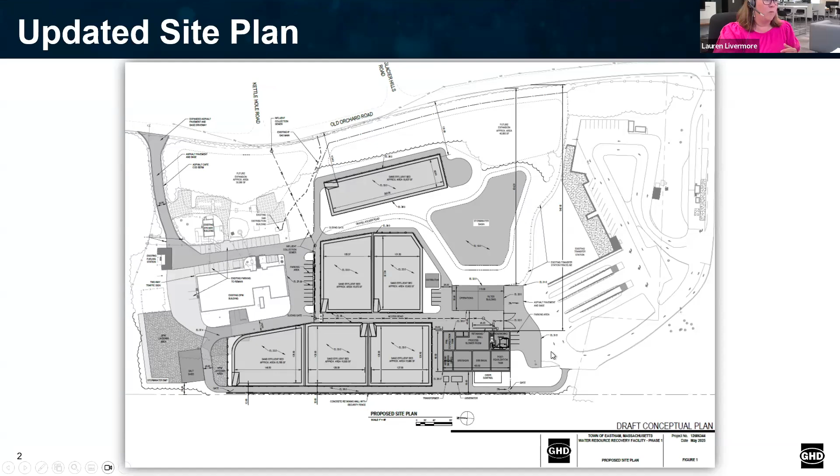So this is the site plan that we've come up with, and I'll go to this one, which is a little more zoomed in and has some of the colors with it. And at the end I do have our old one if someone wants to reference it.

But what we've changed here is essentially moving the administration and operations building and the SBR building, or the treatment building as we're calling it, from these general areas down to basically the southwestern portion of the site. In doing this, we liked having the building over here because the elevations were able to be taken advantage of with this pit. If everyone remembers the DPW site, it's kind of depressed in this area.

In this area towards the southwestern portion of the site, the elevations were somewhat similar, so we were able to maintain a lot of the work we had already done relative to hydraulics and pumping schemes. We just had to change things around slightly.

We were also able to maintain a lot of the recharge beds in their originally placed areas, so the perc tests and other tests already done could still be utilized. We'll have the Mass DEP representative come back to witness two more perc tests, but we've already done perc tests in these areas, so we're confident about the recharge rates we'll be receiving.

Did you add another recharge bed? No, it's the same square footage of recharge area, just arranged differently. If you don't mind, I'll skip to the end quickly. So these are just bigger, right? Yeah, we ended up having 6 here with 1 smaller, and these 5 essentially bigger. This was where originally everything was - the admin building, SBR building, and those 6.

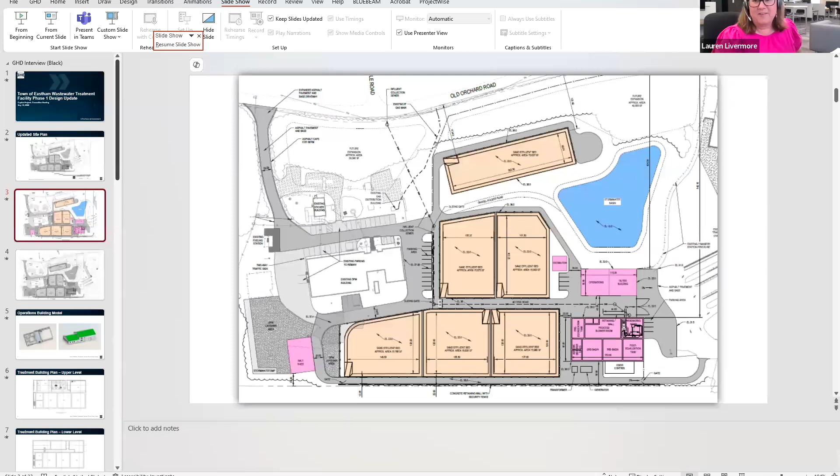So we still have 6. Let me see if I can get back to this more quickly. Go through all these... okay, there we go. No, sorry guys, just trying to be fancy here. So yeah, still 6: 1, 2, 3, 4, 5, 6.

They actually, for the most part, still maintain the same amount of area necessary for phase 1 and the potential phase 2, just slightly different shapes. I joked at our meeting that I'm very much a symmetrical person, so I'd love for them to all be the same size, but it's very common for these recharge beds to be different sizes to meet the needs of the site. This is fairly typical.

Also, in case you're looking at the site plan, we did allow for some future expansion areas in parts of the site. These are the forested areas we really wanted to try to maintain as much of that tree buffer as possible. We don't have our landscape architect on this yet, but we're planning on adding additional fencing and evergreen trees to potentially block the view even more than these trees already do.

So yeah, still 6. Any other questions for this? And you can always come back to it. Okay.

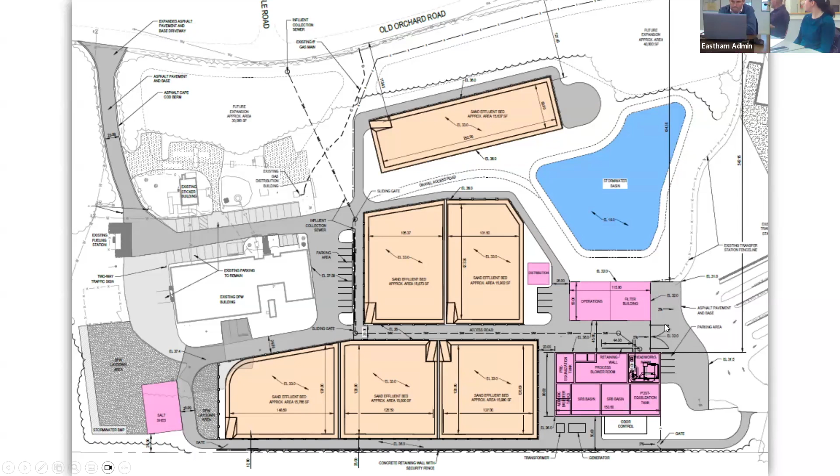So this is just to illustrate what the topography is in the area. Again, we're trying to make use of some of the existing elevations so we have a little bit less cut and fill to do, taking advantage of this existing pit for our stormwater basin.

One question that came up was that we had originally done all the calculations for the stormwater model and sized the basin for the previous site plan. Now that this is pretty much set, we'll be redoing those calculations to confirm the size of this basin. It takes on not only impervious area from the DPW and future wastewater treatment plant site, but also stormwater from the transfer station site, so it ends up being a sizable basin to accommodate all that.

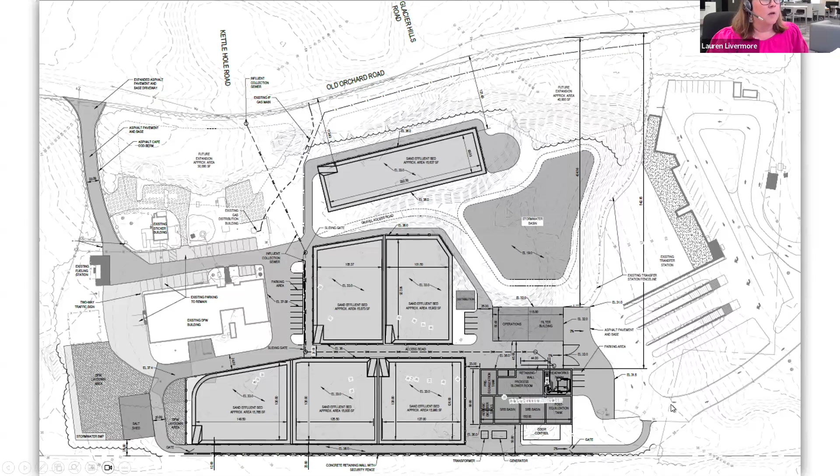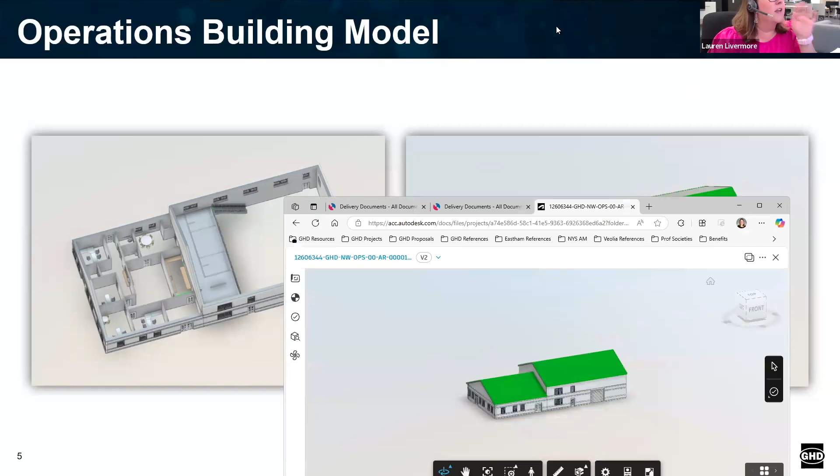So next I wanted to show a little bit more. I was able to show some of the drawings, so bear with me because I do want to show - can everyone still see my screen with the change? Yes, okay perfect. So we'll have all of the buildings in the Revit model, but right now what's finished enough to show is still the admin building.

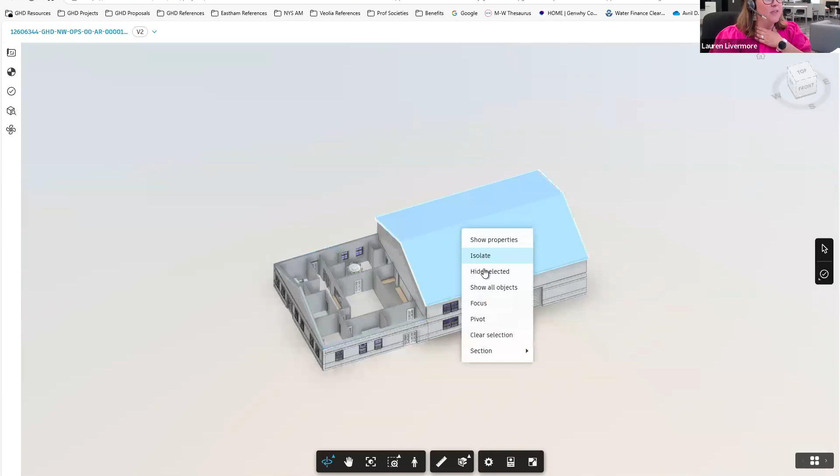I did want to show that we can actually go in, and I think we can even have external users be able to view the site that we have. This isn't the current version of the admin building, but this is what it was before we had a few additional comments with some of the offices and the break room, and this is our lab area.

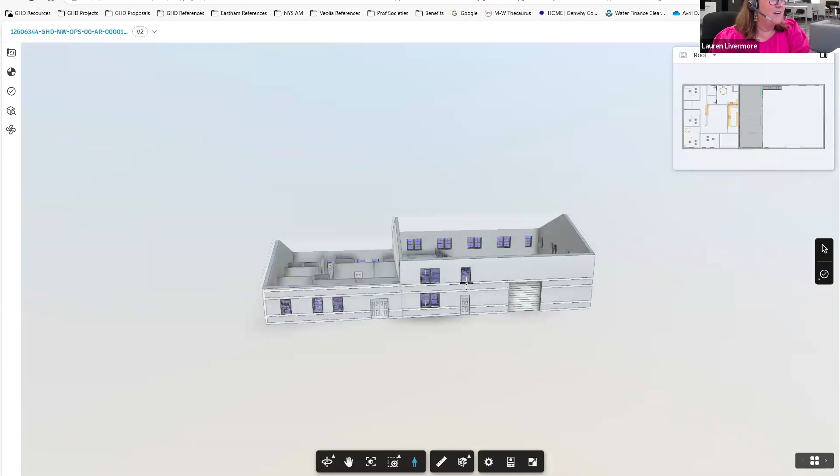In these models, and I'm not really perfect at this yet, you can actually bring your person into here. Of course it's not going to do what I want it to... you can actually walk it. Oh yeah, there we go - you can go through the door. Oh, it let me do it before.

Okay, I might not show that. Bear with me one second.

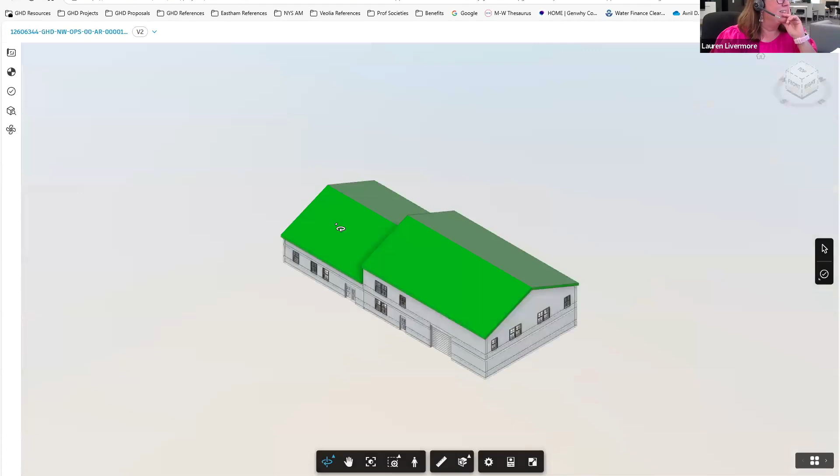But it is really cool. Once I get a little more mastery in this, we'll be able to walk you through the site and the different buildings, so you can get a firsthand view of what it really looks like. This is something we'll have for the other buildings as well, and it's just a nice tool to be able to show. Any questions with that? Sorry, I wasn't really good at getting inside the building.

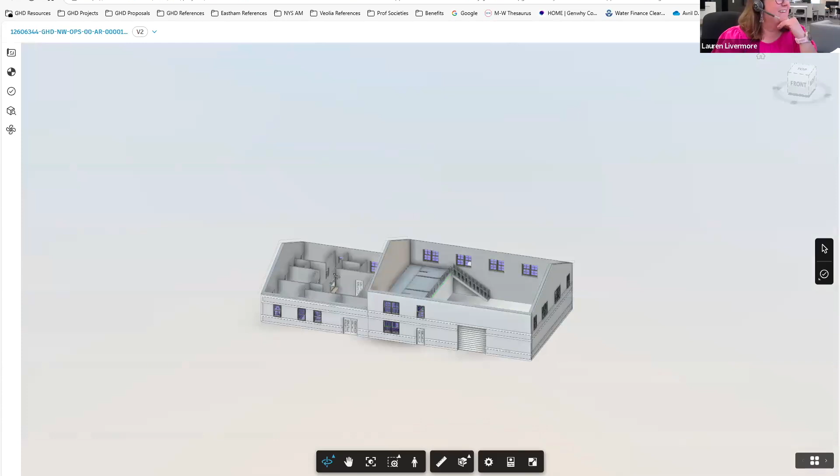Lauren, I just want to explain to the committee, because I think this is a change since last time we talked as a group. We initially had additional administrative office space, the idea that maybe DPW admin staff would relocate to that building for a future DPW renovation, which might minimize what had to be built, perhaps getting away with just the garage and some open staff space. But with the reconfiguration, the admin building now is not going to be in a public area, so we scaled back the admin building piece of the wastewater building. We'll just continue to operate the way we do now at the DPW.

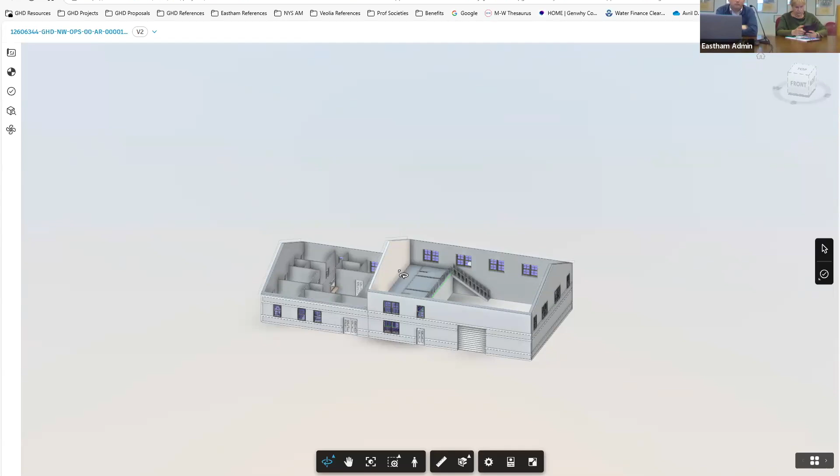Yeah, that's a good point, thanks for bringing that up. So we are looking at making some efficiencies right now, so it won't have the public-facing area to pay bills or anything of that nature. We're looking at a couple options of how to accommodate some common space and maybe make the break room a little smaller. So more to come in our next iteration.

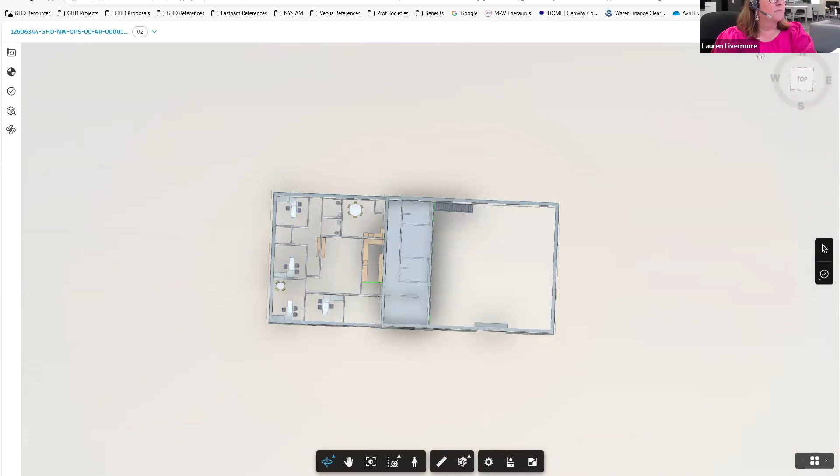Okay, so that's that. Again, I didn't have the model—it's still a little too rough right now to show—but I did want to show a bit more of the treatment building. This one is in the far southwest corner of the site.

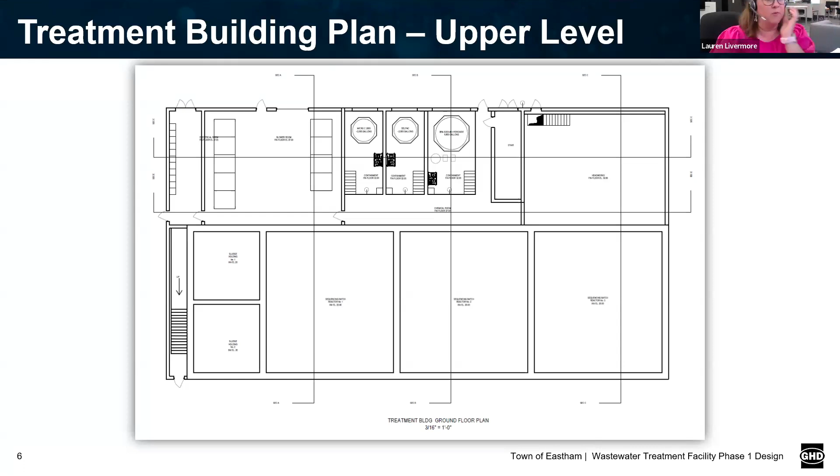Have you seen the transfer station up where we dump our trash? You'll see the building - I'd have to check the elevations, but I think that's a little bit higher, or maybe similar.

I think it's 13 feet above grade from that angle. You'll be able to see part of the building, and the tanks will be behind it, so you might see a little bit of the southern tank. But if you're down at the lower level of the transfer station where you drop off metal, you'll be looking right at it.

As you go down that hill toward the transfer station, it's lower, then it goes back up. So you won't be looking into the tank from that metal area, but you'll be looking at the side of the tank and the side of the building - basically the same elevation.

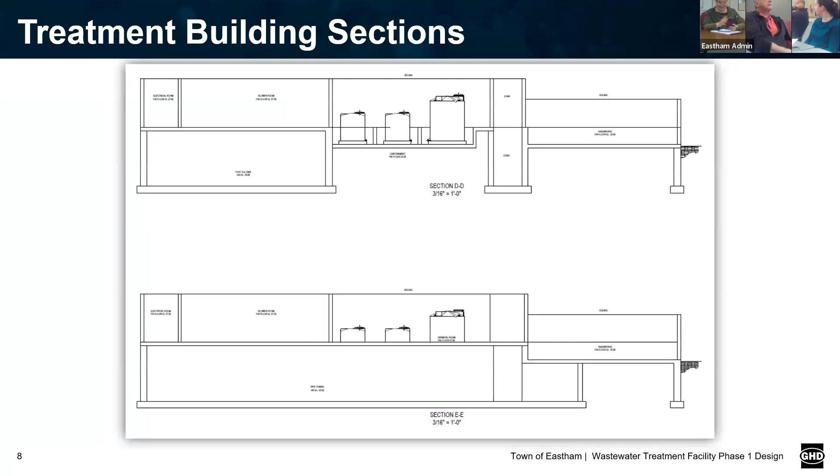Once we get the model, we can show how it would look on the grade, which I think will be helpful for people to get a good sense of it. You could show a cross section there, through the tank and the building - oh, there it is.

Let me get my bearings straight - this view is looking at it from the east, so you're kind of looking into the building. We've made some updates so things are shifting around, but this is a cut in the middle - you can see these are our chemical tanks that are set down into the structure to act as secondary containment.

This post-EQ tank, which you see on the plan, is actually underneath the blower room and will have an access hatch, so that's not open to atmosphere - you won't be able to see that.

If you look at the second plan, we have a pipe gallery. There's a couple of entrances into this pipe gallery, updated since, where there'll be pumps to pump throughout the treatment plant. You can see this is the stairwell leading into it, and then the headworks facility is up here.

You'll be able to enter that just about at grade. On the east side is where you'll have a roll-up door to remove any screenings and grit, and these are our SBR tanks on this side. Looking in from the west, the chemical tanks will just be slightly above, in the building or room where you can see them.

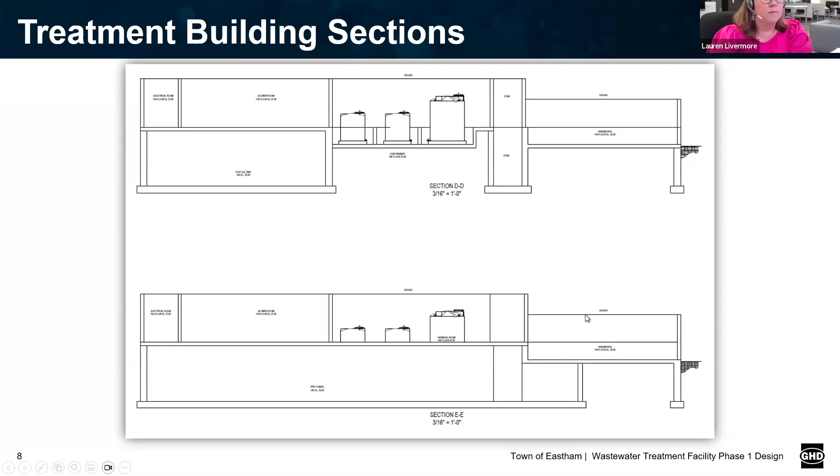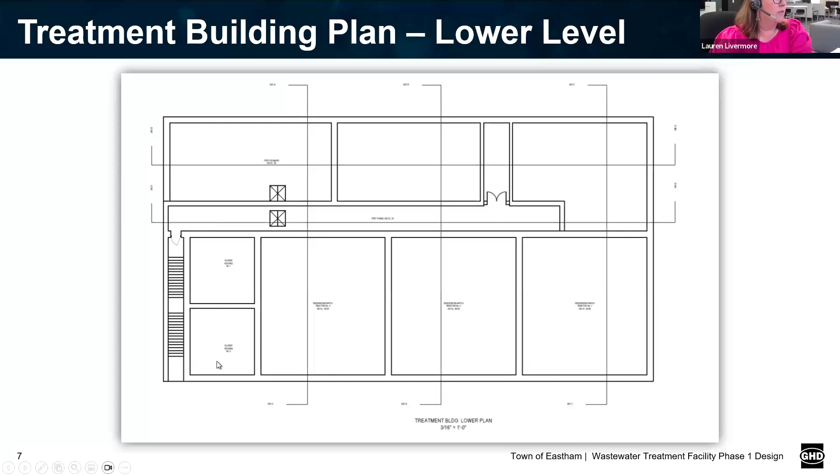Does the building have a roof? Yes, one side of the building has a full roof with a ridge line running north-south. This other part is essentially tanks that would be, in theory, open or covered, at approximately 8 feet above grade, and similar - these will be covered. So it's this portion that will have a roof, and these tanks are pretty set into the ground.

Is this where you were thinking about putting a roof to accommodate people concerned about sight or smell? Yeah, a partial roof. When we were looking at the design before, we had these tanks facing Old Orchard Road, so we were looking at ways to cover them, or cover them with a structure or a fence, since there's a lot more people and activity over there.

But now they're towards the southwestern area. You might have some traffic on the trail, but we'll again have some coverage there.

Did you ask a question? What's the right of way off the bike path? I don't know - that's DCR. We're not going up against it, this isn't that close to the bike path, it's definitely on our property.

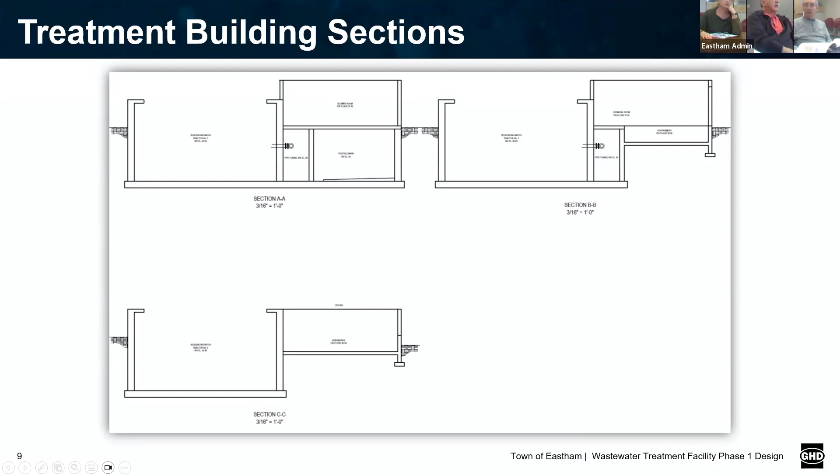Yeah, we did have a drawing, I don't remember exactly - I'd have to check back, but we did have a drawing that showed a distance from the bike path, or maybe the bike path property at one point. I have to double check.

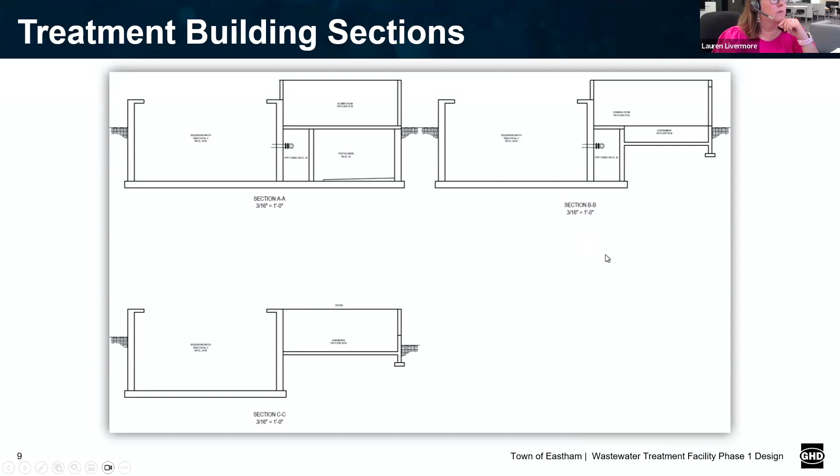So I guess a couple things, and I don't want to steal any thunder, but some things that were being brought up relative to public outreach. These are a few slides I had sent to Hillary, and I think you incorporated them. But just so everyone on CPC is aware, we did try to look at some of the things the community would be most concerned with, and we picked out essentially noise, traffic, and odors.

So we were looking at noise and tried to find the most prevalent sources. Honestly, for noise, I was not too worried about it. We have process blowers, which can be very noisy, especially some of the older ones from years ago. But these, and this is just an example from Mashpee, are Aerzen blowers, which are turbo blowers, and they're not only in the building, but will be in a noise attenuating enclosure. I mentioned at the last meeting that there's a specification keeping the decibel level at a certain amount one meter away, about like the decibel level of a loud restaurant. So just wanted to talk about how we're mitigating certain things to help with community outreach.

Truck traffic, similar thing, I think we've gone over this. There'll be sludge haulers coming a couple days a week in the beginning, and then maybe once a day by the time the collection system is fully built out. But really it'll be far less, and I'm probably jumping the gun on some of my truck traffic stuff, but it'll be far less than what you see at the transfer station right now.

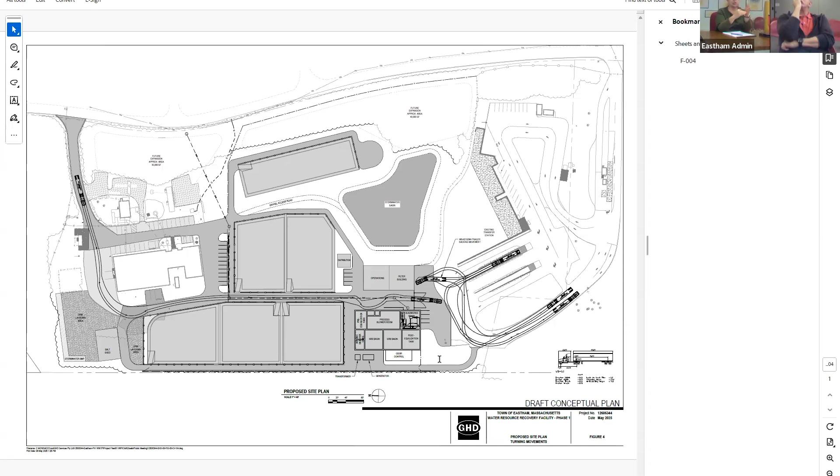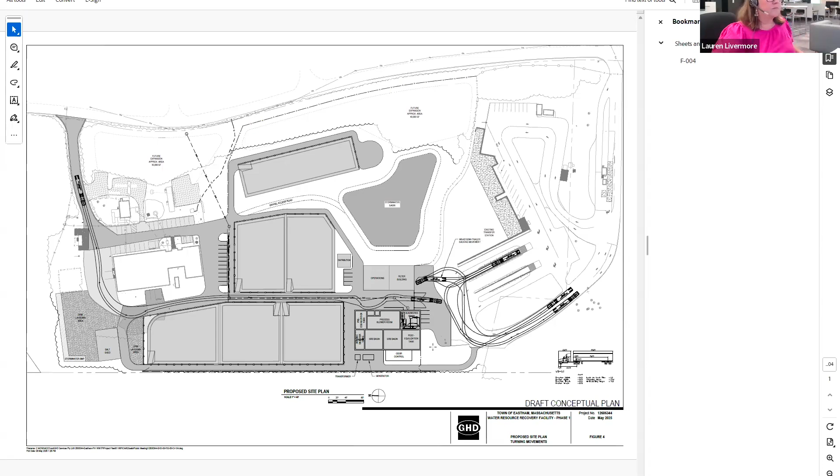When it's sucked out of the treatment tank, the sludge goes first into a holding tank, not directly into a tanker truck. So in this SBR basin, the sludge collects at the bottom and gets pumped over to these aerobic digester tanks.

These digester tanks are covered, and there will be some type of coupling valve, probably right about here, that allows the hauler to hook up their truck and pump out. Similar to the SBR basins, they'll pump out of one tank one day, then come back three days later and pump out of the other one, and vice versa.

So that's an intermediate step - the sludge flows into the digester through pipes, not by truck. The truck is just one tiny piece; it isn't part of the treatment itself. That's enclosed, and then the truck comes to vacuum it out of the digester tank.

So the aerobic digester actually has a function of removing - or how do I say it - making the sludge more stabilized, removing volatile solids. Trying to figure out a good way to explain it, but yeah, basically it's part of the treatment process.

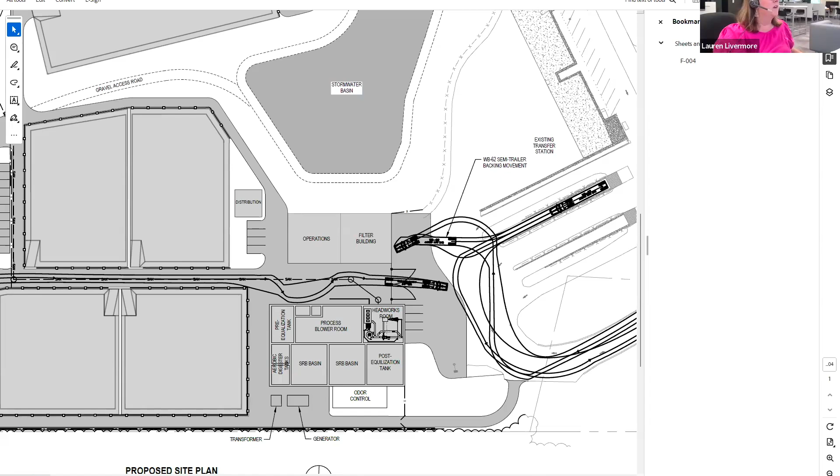A couple questions - if I'm riding my bike on the bike path, am I gonna see the tanks? Let me check. They're 6 feet above grade. So higher up - that will work, so you might be looking down.

And that's something too we can check, because originally I know we had done some of the elevations through Oak Orchard. Oh my gosh, there's an Oak Orchard in my area. So we didn't really look at it from the bike path, but I think you're just gonna see the side of the tank. The elevation of the bike path is around 42, and the tank around 38, so it's pretty close.

I think you'll probably just see the side of the tank for the most part, but that's something as we get this - people are gonna ask. I think it will be good to have because you're right, people are gonna ask. Over here, we're planning on putting some type of buffer landscaping and fencing so they won't see the odor control unit or the generator so much.

There's some pretty dense vegetation there at the moment, in between, and quite frankly it's not really an attractive site. So after a site visit this past week to the transfer station site, having a deep look around in a way I haven't yet, I recognize that what we're building is actually going to appear nicer and fancier than what's there, with vegetation and screening buffers.

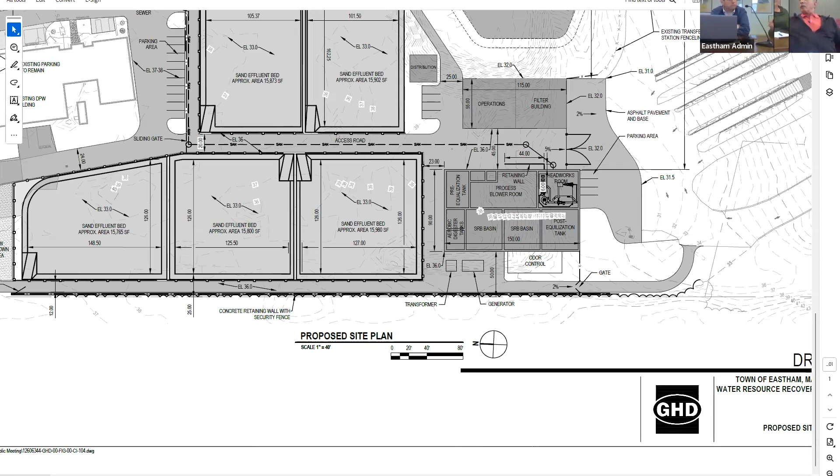I'll say I am very biased, obviously, but there is a plant in my area next to a trail that leads around the local lake, and they are planning on putting up public education signage to teach the public about what is behind this fence. So in the future, depending on how much you want to do with public outreach, you might be able to do something like that.

And what goes on in the odor control building? So the odor control unit essentially takes the vacuum, pulls a vacuum on this headworks room and these digester tanks, and treats the air - I think we're looking at it might be a biofilter, or I can't remember the other model we're considering, but essentially it's not a scrubber, it cleans the air before releasing it into the atmosphere. So that's where all that magic will happen to take away odors from the aerobic digester tanks in the Headworks facility.

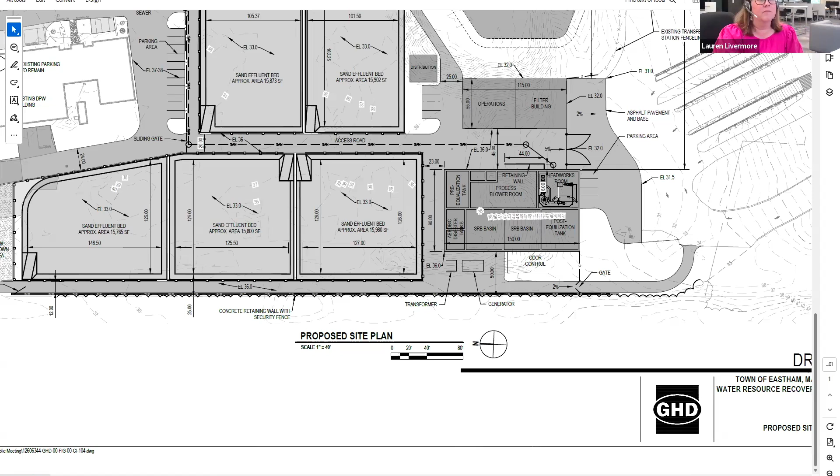I guess any questions? Oh, we didn't cover that yet. I didn't really get that far, but we were just talking about odors. I think we actually covered all this.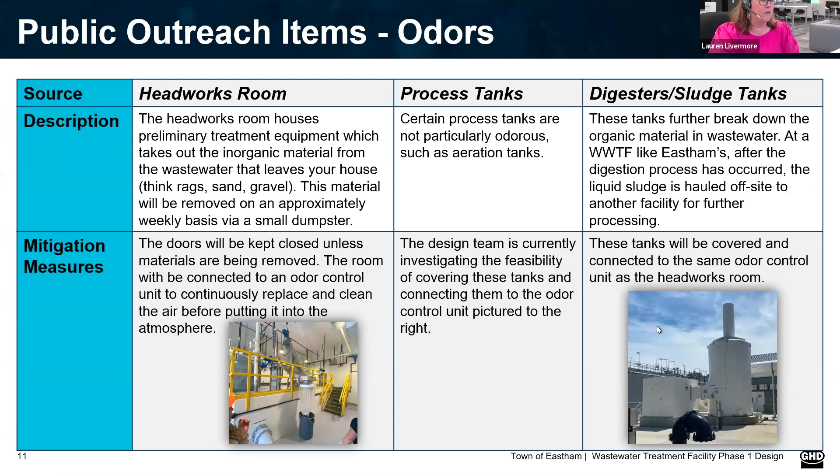So this was the one at Orleans. Just an odor control unit that exhausts the air once it's cleaned.

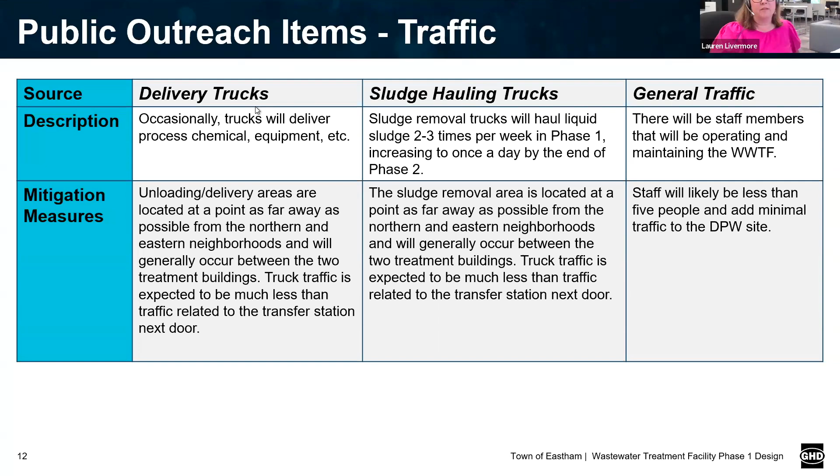And then I think we just talked a little bit about traffic. Same thing, there'll be a little general traffic, a few more workers, sludge hauling trucks, and occasional delivery trucks for chemicals. If you get a new pump or something, they'll usually come on some type of freight truck.

I don't know if you guys have these in front of you, but these were some of the pictures I think Hillary might have included in the public outreach. This was Mashpee. These are very similar to the style of recharge beds we will have at Eastham.

Essentially you can kind of see from the drawing, these are the pathways down for the tractor to be able to grade things out and make sure there's no plants growing in it. So this will look very similar.

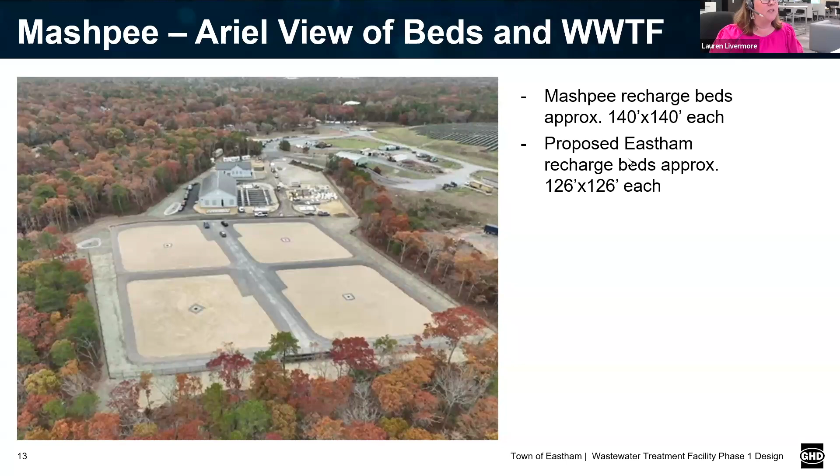And I put some numbers on the size of the recharge beds versus ours. I do apologize, this is pre-update, so this was the size of our original ones.

There was a question before - sorry, I think of recharge beds like the ones out in Nantucket. Do we ever change the soil and the sand that's in there, or is it just left as is?

I think every so often you've got to go in there and scrape the top because of the buildup - just a sacrificial layer of sand, about an inch or so, every so often. You may not need it here at the beginning, but then they scrape it with a machine, just barely scratch the surface. Sometimes you don't get that buildup. And what they scrape off, that has to get taken away too, and then replenished - they add whatever's needed to make up the difference.

And this is not special sand, this is just what we got around. I mean, it's not special in that it's unavailable, but you do have to make sure that it's clean sand, washed, and of a certain gradation. So it doesn't have to be a specific sand, but it is available - somewhere between our sand and playground sand.

All right, but we're not going to... No. Nice of you. Yeah, so that's the kind of unfortunate thing - even though your site is covered in sand, you can't necessarily just take something from the pit and put it into the recharge beds. Unfortunately, that would have been handy.

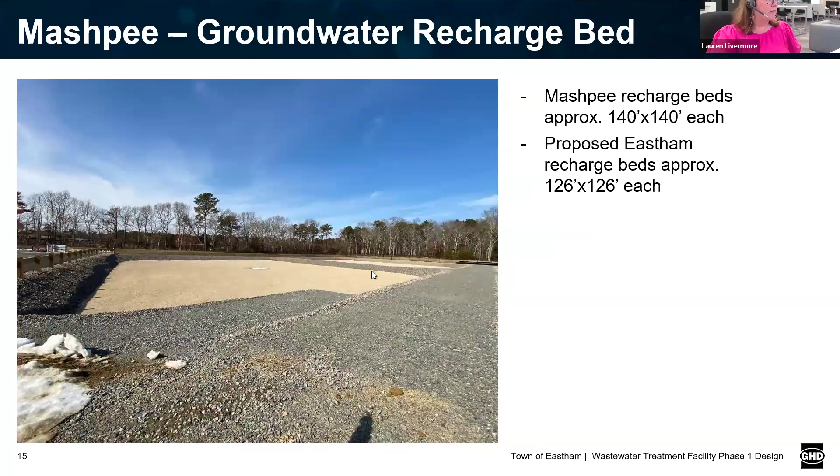Let me see if I got this right—yeah, that's just a close-up picture. You can kind of see the pathway down for maintenance. The building setup is a little different at Mashpee, so this only includes the headworks facility, but this was just a picture showing the standing seam roof and what the building could look like.

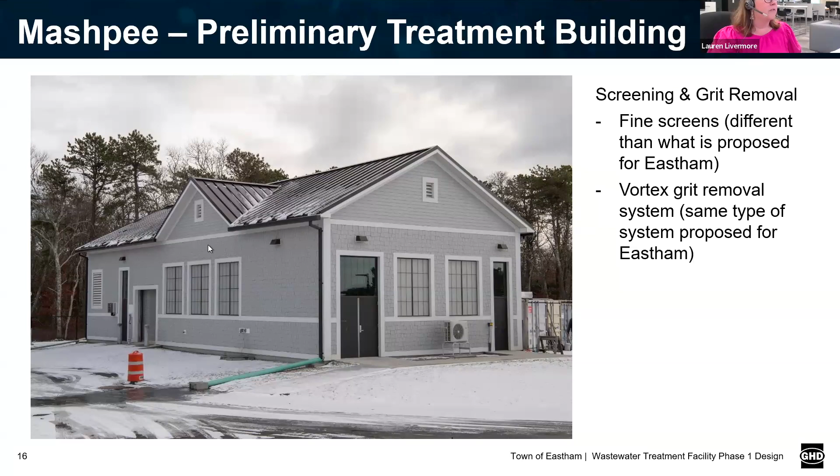These are like translucent panels, so they bring some light into the building. The screens are a little different at Mashpee because they've got a different treatment process, but the vortex grit separator is similar. This will be a similar unit that you'll have.

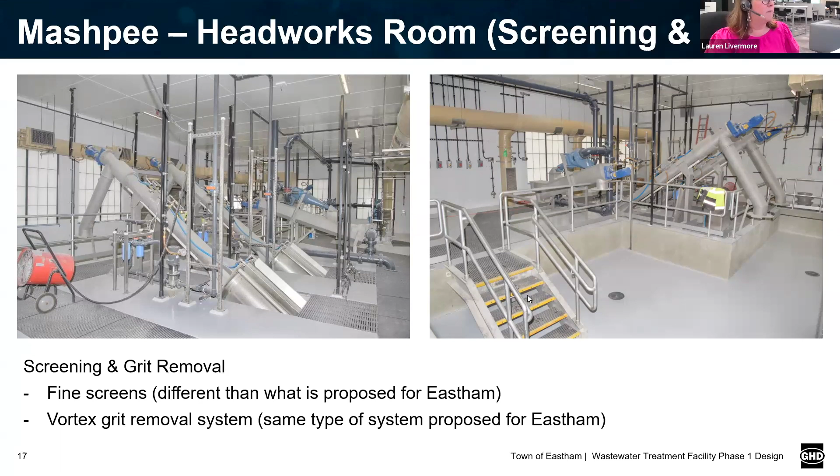And again, this is their larger—oh, somebody had a question? When you said they have a different process, is that because technology has improved, or is it just different because we thought we wanted to make it different?

I don't have the history behind Mashpee, but they have a membrane bioreactor, an MBR. In a previous project before I got involved, we looked at an MBR versus an SBR, a sequencing batch reactor. The sequencing batch reactor met all of the expected permit limits and was cheaper from a capital cost and operations cost standpoint, so that's why that went. I don't know the history behind Mashpee, but I could find that out.

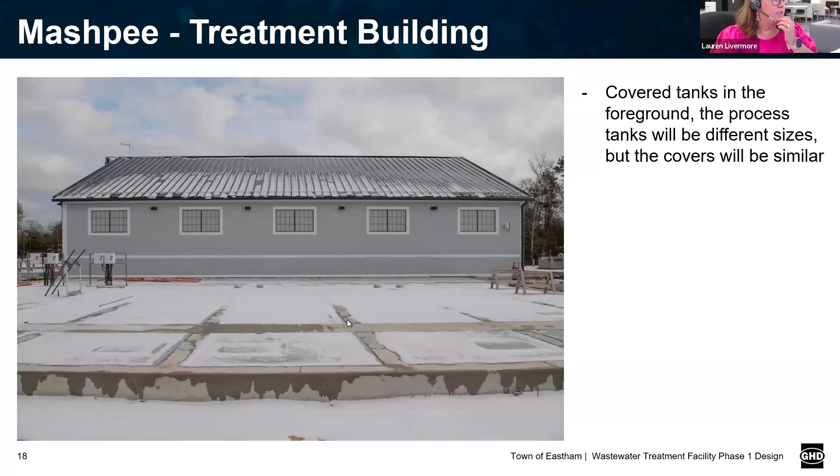So their tanks are actually—their MBRs are actually in these tanks right here. Generator, I already saw that. Oh, these are those blowers.

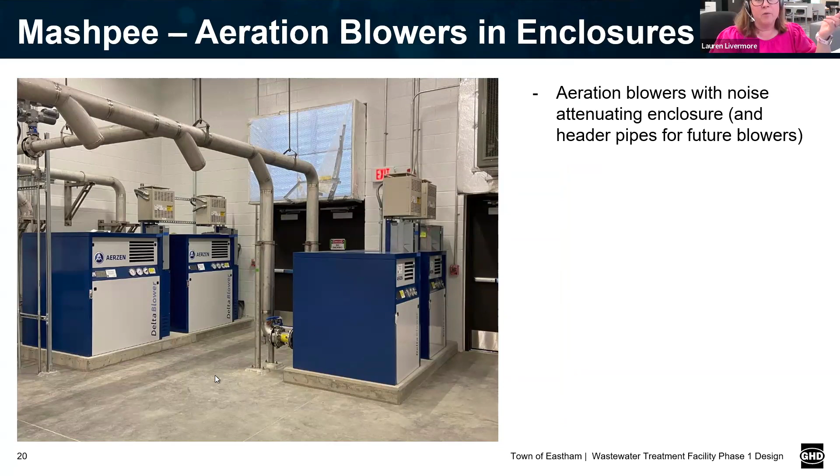I think you probably saw a picture. Similar to what we will have, they've got the header with a few, I guess I'll say, drop legs to hook up future blowers as they expand. So you'll have something similar to that.

And this is the picture—this is Orleans, and I think this is the one that Jackie Beebe and others went to. This actually is about, I'd say, 20 to 30 feet tall. Oh, there's a big stair.

By OSHA you have to have rest platforms every 20 or 25 feet, so this is definitely a lot taller—there's an intermediate rest platform right here. If you think this is like a 6-foot-tall person, maybe where the form ended right about here, that's probably about the height the tanks would be at Eastham. So I did want to show that.

And these were just some of the previous layouts I brought up just in case. So I guess that's what I had. Any other questions? Why is Orleans so tall?

That's a good question. I don't know if it was related to the soils in the area or the hydraulics. Originally, when we were looking at having the treatment building on the north part of the DPW site, we were planning on having tall tanks so we wouldn't have to dig into the ground and excavate, or put in sheet piling to keep the sand out of the excavation. That's why we really liked putting it either in the pit area or in this lower area, because we can take advantage of some of the lower elevations.

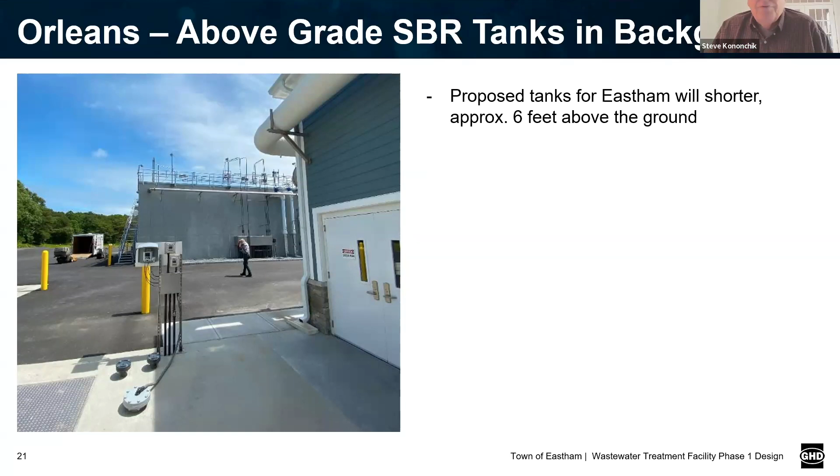That is a great question. Honestly, it should be very minimal. I don't necessarily have a decibel count that I could share right this second. Maybe decibels isn't transferable to the public - maybe it's more like you'll hear nothing, or you're gonna hear occasionally. There's got to be some sort of description, I would think.

I think what I tried to put in here, maybe I can make it a little more visual. For our specification, the decibel level needs to meet 77 decibels, 3 feet away from the equipment. So that's in the building itself. For comparison, a normal conversation like we're having right now is 60 to 70 decibels, and a telephone dial tone is 80. So maybe we could use something like that to explain it.

Outside the building, which is where the public hearing is, you shouldn't be hearing anything. But we could look at how it would sound at the trail, because that would probably be the loudest area. I think it'd be more interesting. I can look at how you can degrade the sound as it goes a few feet farther.

Watch out, that pump must make quite a bit of noise on the truck, or that pump - take like the honey wagon, but they pump it up. But isn't that the same as you have in your backyard that's pumping? It's like pulling up to the septic tank. Yeah, it's just more open - the septic tank is more open, right? This is a closed connection.

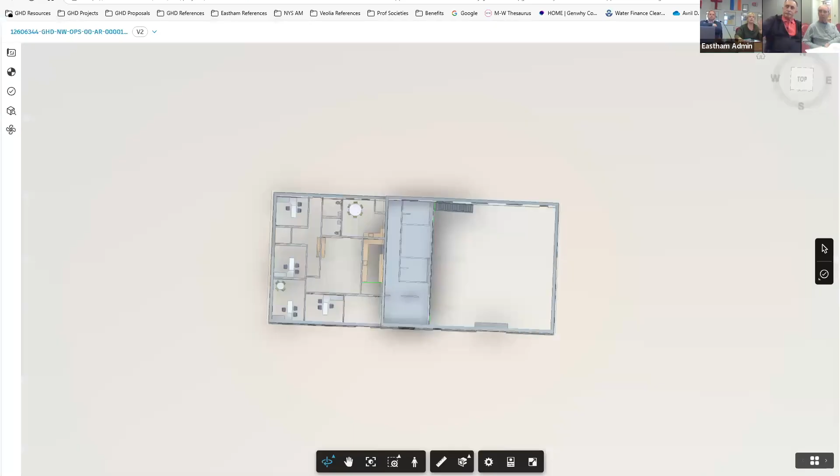Lauren did have a diagram of the main tank that's processing and how it segments out. I looked for it, but don't worry about it today.

There's a lot of good educational materials on YouTube, some good examples. If someone was interested we could send them a link or have a QR code they can scan. Yeah, that was a pretty good one, I thought.

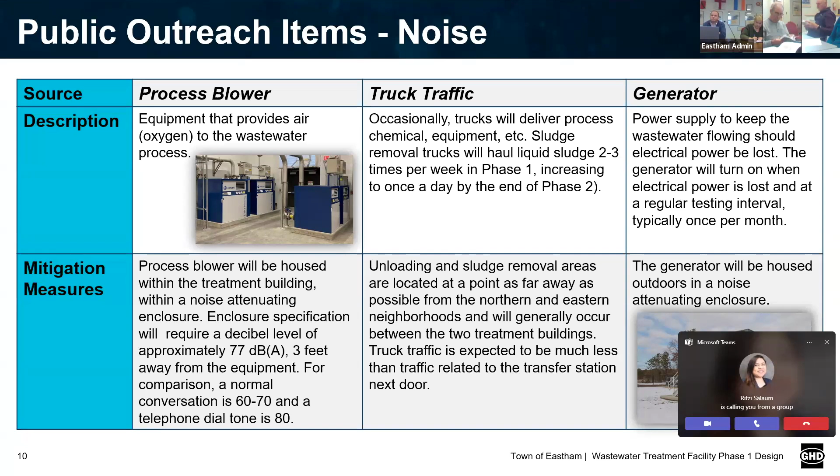This is from the April 8th committee meeting, where you had this long explanation of the SBR and the cycle time on each phase. That's pretty, but it is confusing when you verbally explain it.

Like what tanks are covered, what tanks are open, what's going in from underground versus above ground. People are nervous about anything that's open to the above air. But the only thing that's open, I understand, is the SPS.

Correct. What's the noise level of a pumping station? Is there a noise level? Any of the pumping stations that you put in different parts of the collection system, does that make a noise as well?

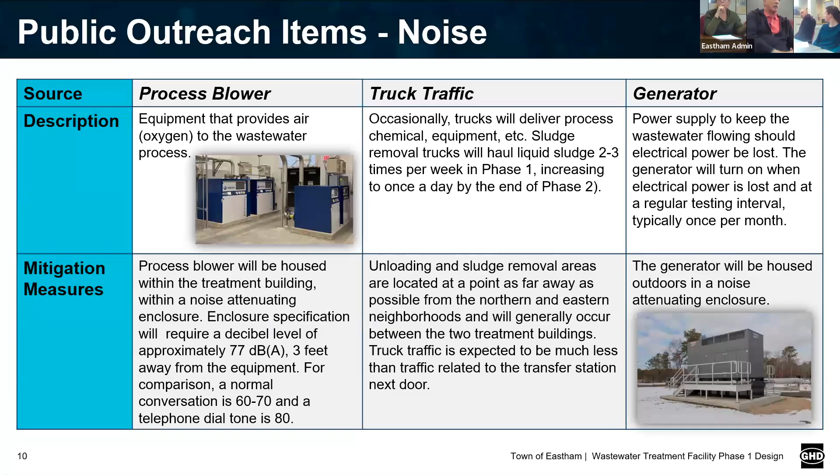No, those are below grade pumps, you usually don't really hear anything. The only thing you would hear is the generator when it comes on, if there's a loss of power or if there's an exercise test.

I'm just asking if you're putting them in a place like Cape Cod Children's Place, or a duplex, and you're driving by, would you hear anything? You would not hear it. I'm just curious. And the generator might be mentioned too — it's indoors, so that helps.

Is that a pumping station in the Stop and Shop parking lot? I don't know about Stop and Shop, there's one on Old Colony Way. I saw that one. Probably it's above ground in the Stop and Shop parking lot, next to the pizza place where they've got it all dug up. No, this one's in the parking lot. There might be something else — a fact sheet for people about pumping stations.

They dug up the whole thing because that's a different geography. Are you talking about Orleans? I don't think I've seen that one — everything's underground, they just look like sheds. Oh, they put a pump station there for the Stop and Shop and the development behind it, I think that's what they did. I saw that at the New Year presentation. So it's its own pumping station for that whole development.

So next time you're in the Stop and Shop parking lot, out past the other drive that goes up by the bird store, you'll see a big vent pipe coming out of the ground, like a candy cane. I go there all the time, I noticed it but didn't realize what it was when they were building it. It's a vent for the wet well.

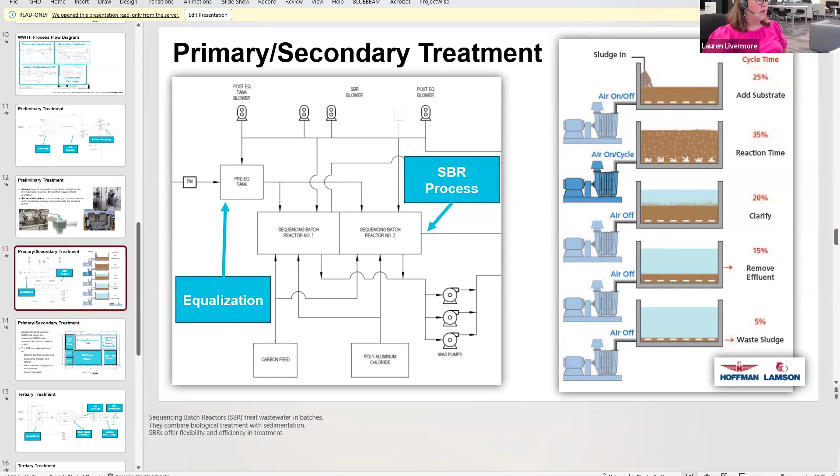And I think actually I had a picture. Oh, which one is it? Nope. Sorry, now I have so many PowerPoints, I don't remember.

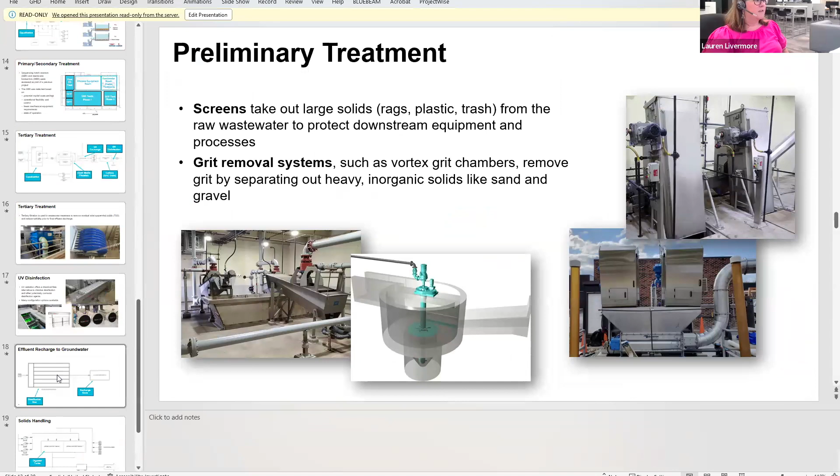So yeah, well, this is where it's coming out of. So it's actually coming out of here and going into a plastic sleeve. And I think I've got that.

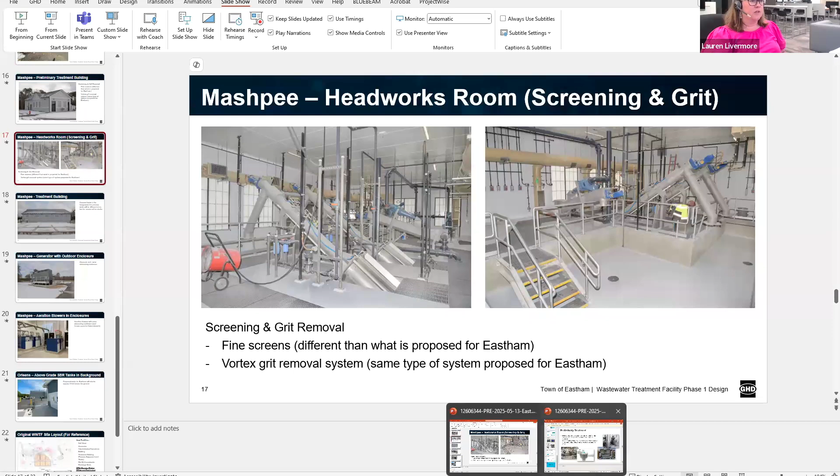If you have another question, I'll grab it while we're talking. But yeah, so you're making it even better because you're not just dumping it into a dumpster straight, you're actually washing it out essentially and taking the water out of it. And I think it's the details, like putting it into a plastic sleeve, into a plastic trash bag, rather than anything that would interact with the open air.

Right, that's a good point. So yeah, those are the things we need to know so that we can explain it to them. So I think it's this picture... nope.

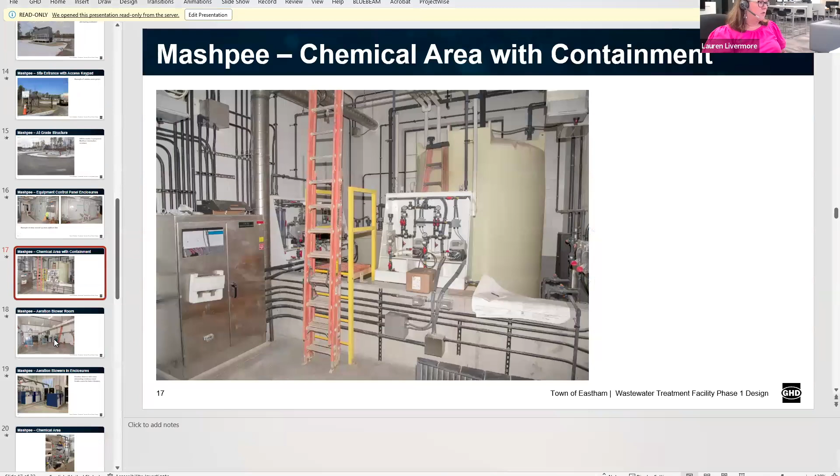I think we've got calculations on how much you would expect to see, but it's kind of hard to tell until things start coming down. But yeah, that's what you would see, and that helps mitigate the odors even more whenever the doors open. We can look at least for like a man door doing some type of airlock.

It'd be nice for people to see what the inside of this thing is like, how clean it is. I don't know if people understand that.

I'm just not sure, some of the pictures, I'm not sure that's a good one. I'm not sure what I'm looking at, so I don't want to show it to someone else unless I'm sure of what it is. I would just show it to them, to show how clean it is, not necessarily anything specific. That's why I like the visits, because they're exceptionally clean.

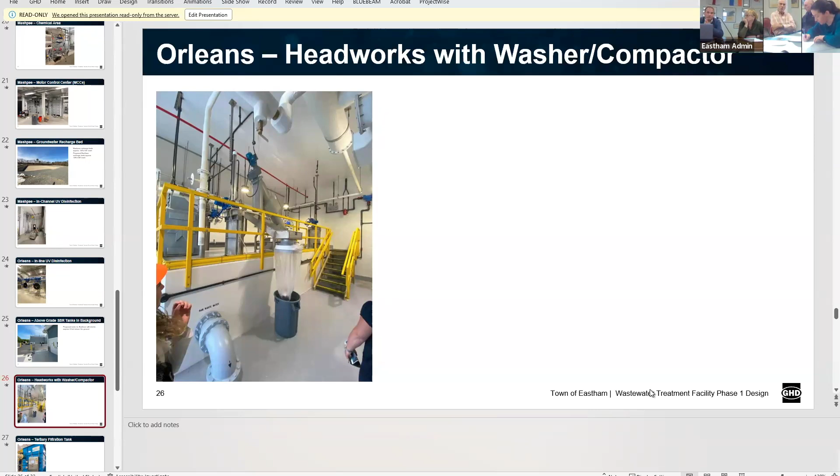The lawyers are still tweaking it, I sent it to bond counsel, so we could still get a recommendation based on the draft. Or maybe you feel you're not quite ready yet, and I was going to suggest perhaps you could defer it till town meeting floor. Oh, and when does it have to go to the printer? Tuesday, Tuesday.

It's coming Tuesday, yes, so Monday... Tuesday. There are lots of deadlines that have been kind of intense, to be honest. So we'll have to decide what we're doing on Thursday with the finance committee. So next Tuesday it goes to the printer.

A week from today, the select board will vote on the ballot questions, recommend the article or put it on the warrant, then recommend it, and then we go to the printers. That will be mailed out to everybody too. We're gonna do the same thing, just like a regular annual town meeting.

We may need a finance committee transfer.

Just one other piece on outreach. We were going to attempt to translate the booklet for our environmental justice folks and have it in translation available at the library, the COA, at the food pantry, possibly at the community fridge because it's right out back. So that might be nice too, to have that available.